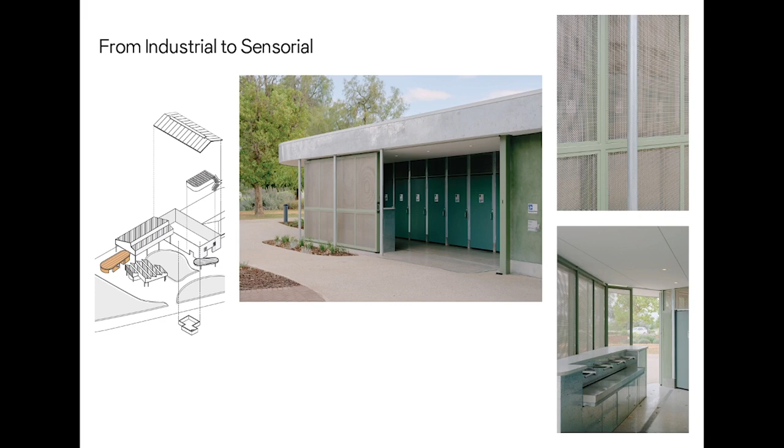And, sorry, this is what hemp looks like being formed up on site.

So this shift from the kind of industrial object to something that was much richer and diverse as a sensory experience to help you navigate through this landscape, which will continue to shift over time.

Really, primarily for us, it was about this expression of mass, skeleton and skin. So the powerhouse itself anchors the precinct with its vast mass. The boiler house building is reinterpreted as a kind of skeleton with rusted skin. And then we play with luminosity and transparency across the other buildings, which is really around passive surveillance, nighttime lighting, CPTED, all that kind of stuff.

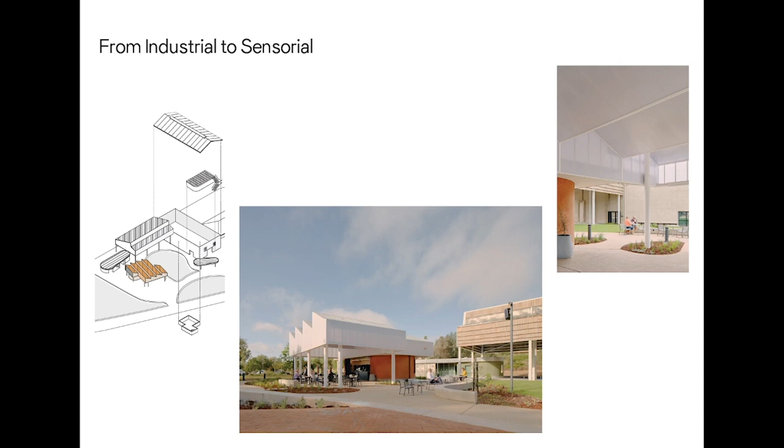And both externally and internally on a really lean budget with a whole bunch of complexities during construction. You will remember that the Murray flooded pretty substantially.

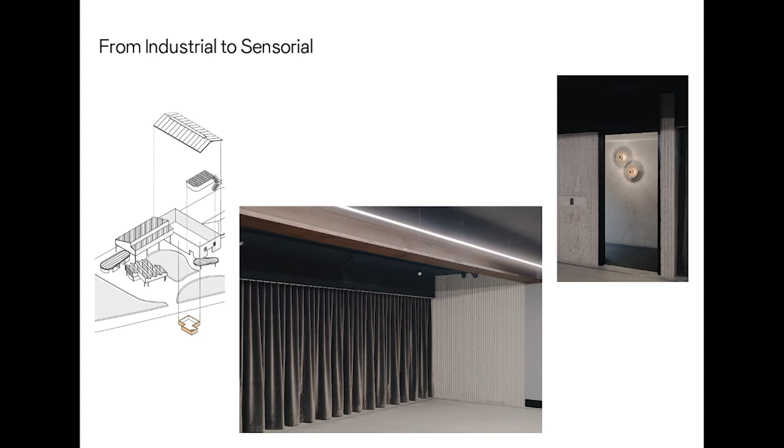We have prioritised textures and materials that have a nod to the industrial past, but are really rewarding to the senses through that tactility and a kind of density of tactility. There was a real attempt to stay away from any kind of institutionalised Melbourne architecture.

The next big idea was this shift from a kind of formal to informal language. So once we had reinstated the boiler house building, we were fast approaching the village green that the master plan had set out. That term, so the Eurocentricity of that term, but also its spatial typology, was really clearly rejected from first consultation with traditional owners, broader Aboriginal community and the wider community.

So there was this real emphasis on kind of fluidity and intimacy, I guess, and really bringing the industrial scale down to something that was much more tactile.

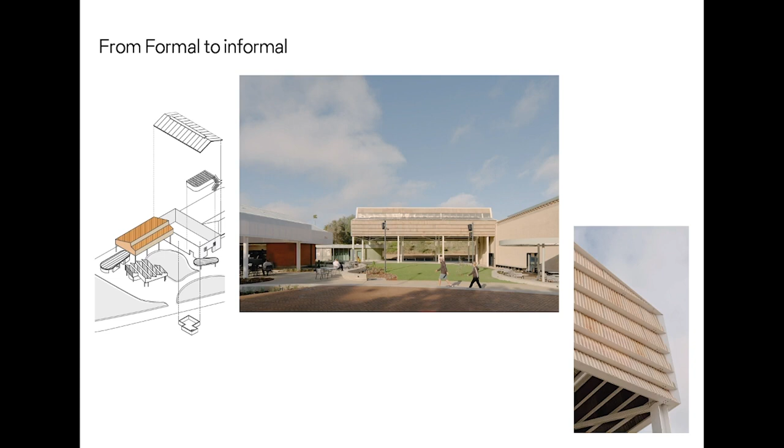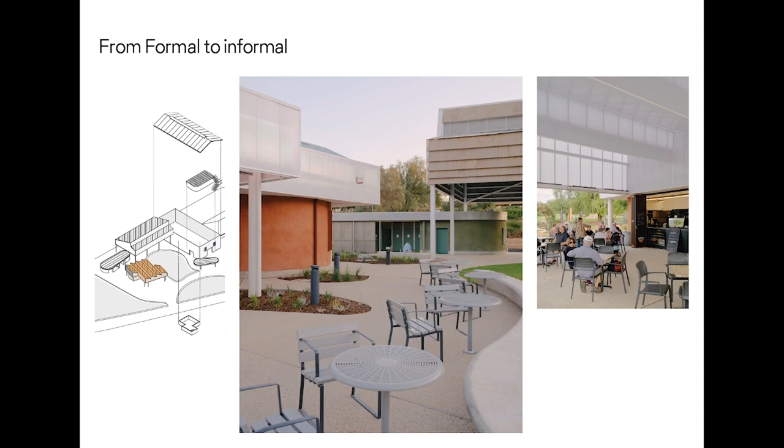What we tried to do was really use the least amount of built form possible, going back to this community, real resistance to overdevelopment. This is essentially the fourth concept design we did for the project. So it was really about how little can we build to make sure that we create this sense of zones and place. So we leant on landscape, still immature in these photos, but landscape and the shifting ground, which does move substantially across our site and the surrounding areas.

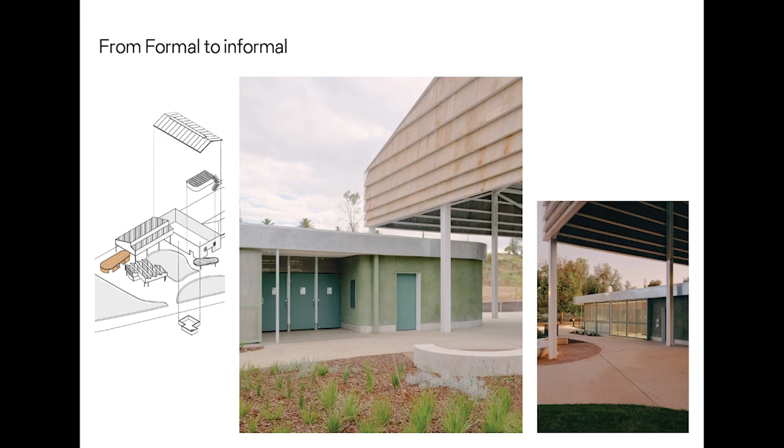And this is both political, but it's also profoundly pragmatic. So we are essentially a catalyst for reactivating the riverfront, and there's going to be vast development that happens around our site. It's master planned, but of course we don't quite know how it will unfold. So this precinct really needs to be able to jostle with the community demand and with future changes to the precinct.

Internally too, there's a fluidity and a visual porosity. This is the powerhouse shown in kind of shut down mode, which means that the council can program each of the discrete spaces, but the glazed walls are operable. There's many lines of curtains to make sure that they can function in kind of festival or event mode as well.

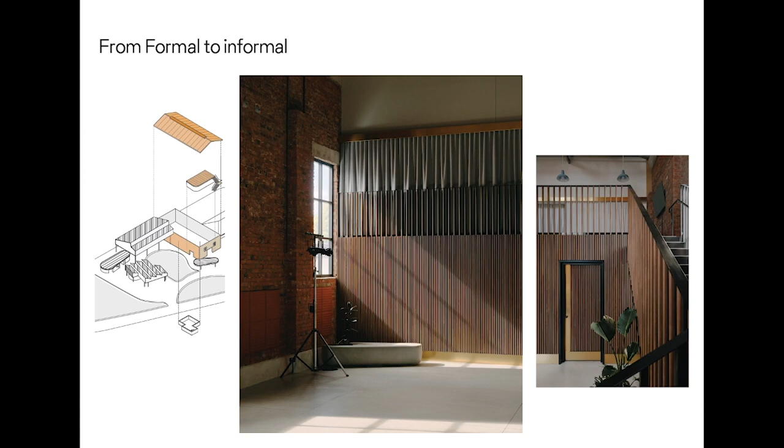The last, kind of significant idea really is this response to the need to be read from above grade, at grade, from below grade, in fact, from down at the river. And you can just catch a glimpse of the bridge to New South Wales here. So, this kind of distance as well for tourists coming into town with the caravan.

And so the design response was it's essentially a series of roofscapes, but we talked to the community about this idea of hats, which makes a lot of sense in this climate. So the boiler house itself is kind of vast and scaly. It wears the rusted roof sheeting from the powerhouse building. The toilet building that you can see here as you descend from the CBD wears a little cap, so it has a kind of openness around it that marks one of many entries into the site.

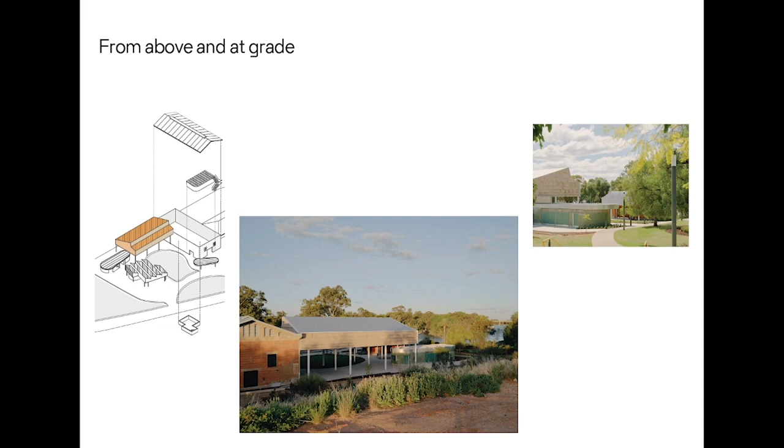The cafe, again with a kind of playful nod to the industrial past, wears this really compressed sawtooth roof, but it has this luminosity to its skin, so it can be illuminated all of the colours of the rainbow, and acts as a kind of beacon signifying to tourists and locals alike that something is happening here at this place.

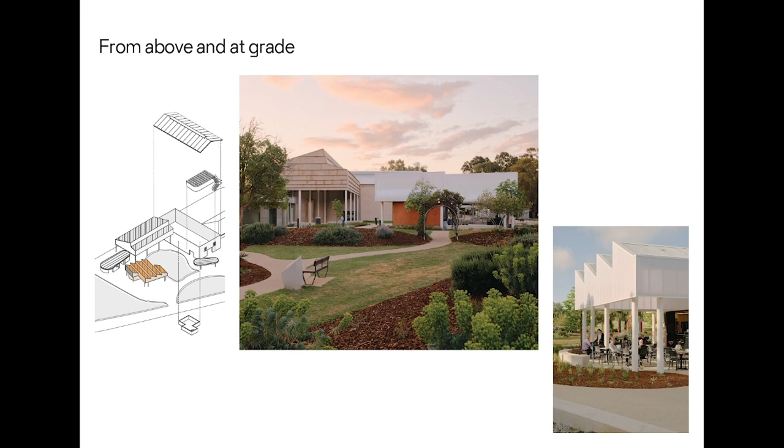And what is happening here, we think, and Council's placemaker, who they bravely put on to run the precinct, I think would agree, is that this is really about the community kind of seeing itself and each other and renewing its sense of self through these encounters in this place, rather than kind of consuming what the original pitch to government had set out. At the opening ceremony, the Mayor declared that Mildura finally had its own Fed Square.

So with apologies to Don and Lad, we kind of feel that that's proof that this is in fact the people's powerhouse.